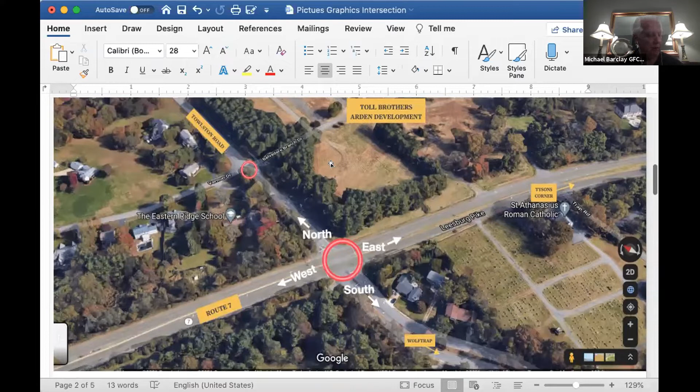We have about 10 or 12 members of the community that have asked to speak tonight. And as Scott said earlier, we're going to just roll through those without discussion of the individual issues and go through them completely. After that, Bill Cutler and Steve Kuntz are going to make a presentation on some of the design issues. And then we're going to go back into the individual issues and have a more hearty discussion on them on an issue by issue basis, so we make sure everybody's satisfied.

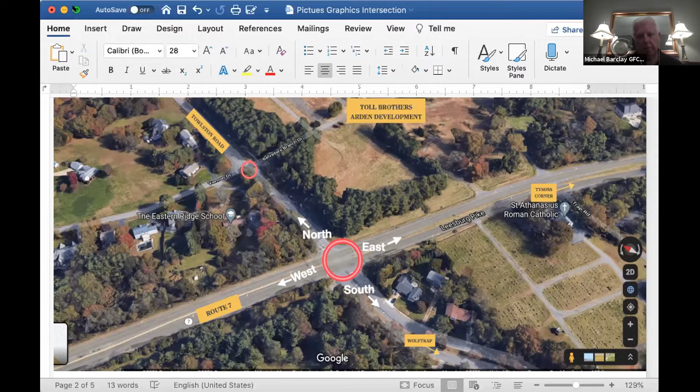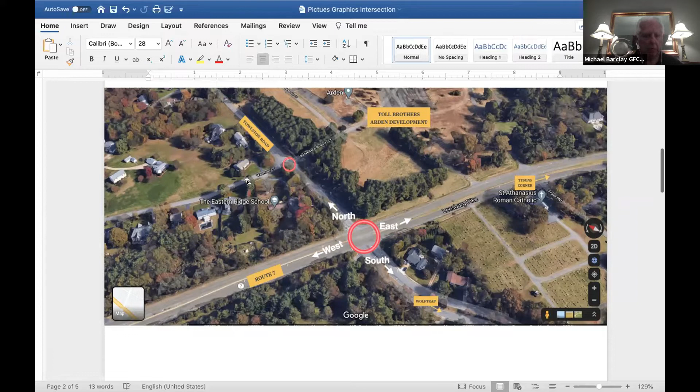I thought I'd start with 3 slides that give you just kind of a basic orientation to the intersection. The red circle there is, of course, the intersection. Eastbound, Route 7, of course, heads towards Tysons, westbound towards Leesburg, and then southbound Towlston heads towards Wolf Trap. As you can see, the small little circle up there is the intersection leading into the Arden development. Scott, if you go to the next slide, please.

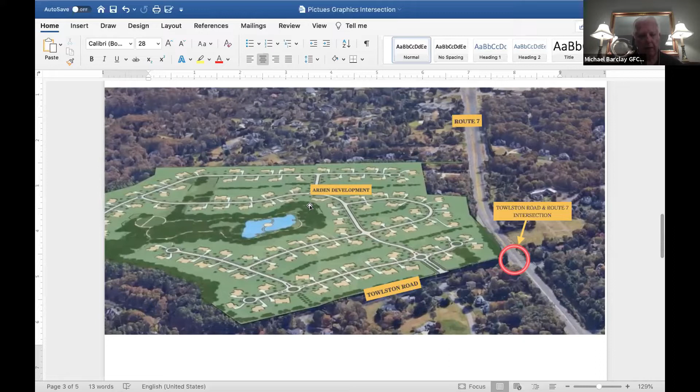And I wanted to give you a sense of the scale of the Arden development in relation to the area around it. It's pretty impressive. There is one entrance and exit out of the Arden development at this point. And it's 100+ homes. We don't have an exact count, but it's quite a bit of traffic that is going to be generated out there. And the point of showing this also is to show how close the entrance and exit of Arden is to the Route 7 intersection. And there's a lot of concern about the impact of that. Scott, next slide, please.

We know that VDOT has very specific design standards for intersection sight lines. What that means is that when a car is turning left onto Route 7 from Towlston, the driver would have an unimpeded view of traffic traveling west on Route 7. Sightline distances are expressed in terms of feet. That is, how far can the driver of the turning vehicle see a vehicle approaching the intersection. So the higher the posted speed, the longer the sightline distance needs to be. And the more lanes the vehicle has to cross, the longer the sightline distance requirements.

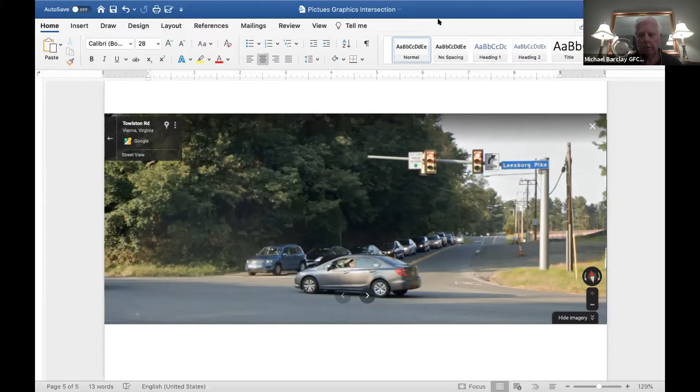We need to turn Carl on. Okay, I think I'm unmuted now.

My name's Carl Pearson. I've been a resident of Great Falls for 32 years, and I've been on the Transportation Committee since 2009. My involvement in Towlston Road goes back to Toll Brothers having two entrances, exits, one further down Towlston Road, which was very dangerous on a hilly blind curve.

My former colleague at GFCA, Eric Knudsen, and I did a traffic count, and we showed that there was as much traffic coming into Towlston as going out of Towlston. It's a busy road. And Toll Brothers decided not to have that second entrance. That would have been another accident creator. I had intended to go over and look at trucks turning into this development, understanding that these houses are being sold. Moving vans are 18-wheelers and they're huge.

But we had an incident that occurred at 5:30 p.m. on Monday, March 22nd, when our daughter was first in line to turn left from Towlston Road onto Route 7. She looked left and saw an 18-wheeler speeding to make the right turn onto Towlston. There were cars behind her, so she could not back up. Fortunately, the truck driver saw that the intersection was too small for him to turn, so he hit his brakes hard and skidded into the intersection, narrowly avoiding our daughter's car by inches.

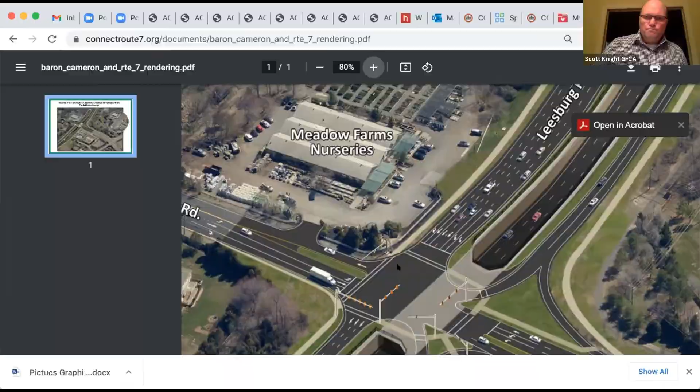David Spencer, you wanted to reserve whether you wanted to speak on your topic. Do you want to speak now or wait till perhaps later? Yes, I specifically want to see what the final design of the intersection will be, because my concern today is that there is no way to widen that intersection because of the location of utility poles and the support arms for the traffic lights. And something is going to have to be moved either on the Arden side of the property or the northwest corner of that intersection to widen it sufficiently to give enough lanes to contain the traffic that wants to turn left and or allow for right turns.

And the intersection is far too narrow. As Carl pointed out earlier, large trucks cannot make the right turn off of westbound Route 7 onto Towlston Road today. So I'm very interested to see how it is that VDOT will address those issues. Thank you. Thank you, David.

Jennifer Falcone is up next, but Jennifer's asked to reserve her speaking time until later, after the VDOT Dewberry presentation. And we're going to move next to Bill Cutler from VDOT and Steve Kuntz from VDOT's design contractor, Dewberry. They're going to present a 10-minute overview of the intersection. When they're done, all the issues that we've raised but haven't addressed, we're going to go back in and look at those in some detail. We want to make sure that people's issues are addressed and where we have answers they can give really good explanations of what's going on.

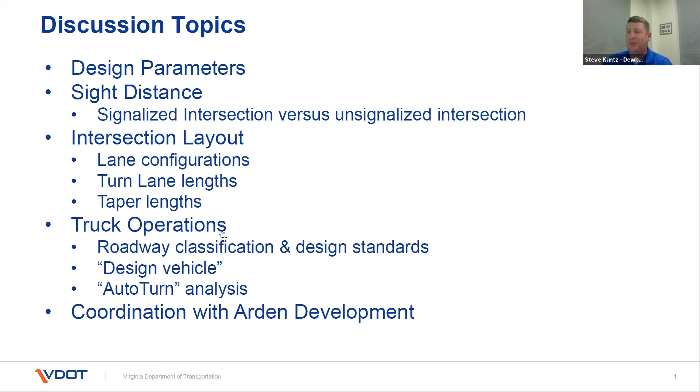So as Bill mentioned, all of the points and comments made here this evening are certainly valid, and they are things that we consider throughout the design phase. So I think we will have some information that we can share on each of those topics to hopefully alleviate some concerns. 10 minutes is not enough time to go through them. We do have several slides here, and I'll just hit on the highlights that I can. Certainly Route 7 is designed for 60 miles an hour. Towlston Road is designed for 35 miles an hour. That's not necessarily the posted speed. And I think somebody hit on it earlier.

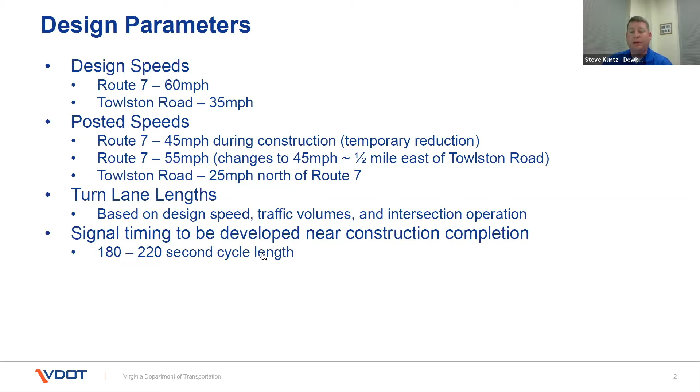We've reduced the speed to 45 miles an hour currently during construction because frankly, many of the elements of Route 7 prior to construction don't meet the design requirements for 55 or 60 miles an hour. So when there's construction activity and work zones going on, it was even more important to reduce the speed to 45. But the plan is to increase it back to 55 when the improvements are complete and the roadway's brought up to current standards to meet the 60 mile an hour criteria. A lot of discussion about turn lane lengths. They will be lengthened as part of the permanent improvements. And then signal timing is something that we can talk about in a little bit more detail later.

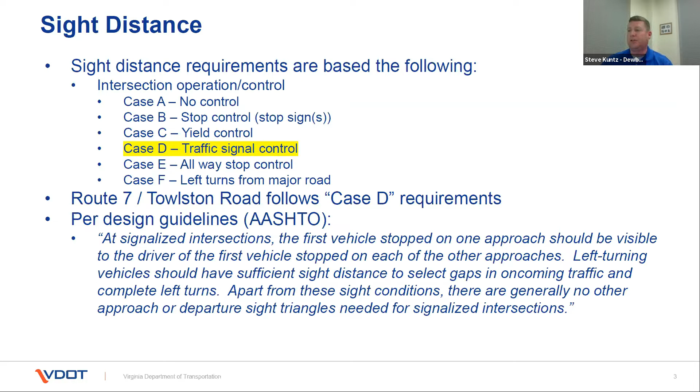Certainly sight lines and sight distances at signalized intersections and unsignalized intersections, each of those has their own requirements. As Mike hit on earlier, they are dependent on the design speed. They're dependent on the width of the road in many other cases. At a signalized intersection like Towlston, it's different than at an unsignalized intersection. And even though at a signalized intersection, you only need to look at the very immediate area around the intersection, we do have adequate sight lines much further than that. And we can talk through those details here in a little bit.

Now, truck operations is something else that we consider. One of the things to recognize is there's a lot of different types of trucks. There's single unit trucks that are not articulated. There are articulated trucks, and of those, there are many different lengths. The large trucks that you see on the interstate, the long haul trucks, typically have a 53-foot trailer. Those are identified as a WB67, and that's not what this intersection is designed for.

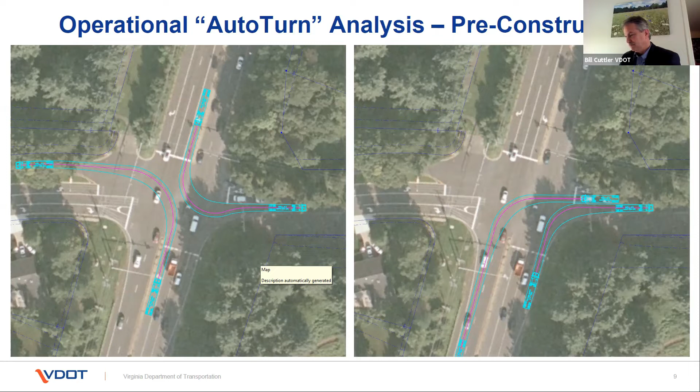But in all of the configurations that we looked at here in this interim condition, which is close to what's out there right now, you can see the WB40 is able to make that movement without off-tracking into the adjacent lanes. The WB40 is typical for this type of intersection, as I mentioned. If there's a full 53-foot trailer making this turn, they would need to go into the opposing lanes, or the back end of the trailer would run off the road a little bit. That can occur in some situations, but it's not the design vehicle for this type of roadway.

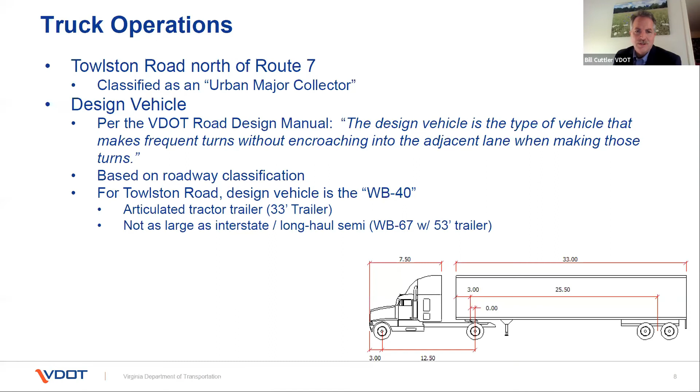Steve, can you just clarify, because I think this is a really significant improvement that we're going to make. When you're on westbound Route 7, as you just said, there is a very short right turn lane. Can you describe how short that right turn lane is today, and when we're done in the final condition, what is the length of that right turn lane? Because when you add length, it's not just about storing more vehicles, which is partly what it does, but in the free flow condition it also allows vehicles to slow down in that right turn lane. And as Mr. Pearson said earlier with the story of his daughter and that unfortunate incident, it sounds like a truck driver was not slowing down enough. So with our new right turn lane, go ahead and describe the differences.

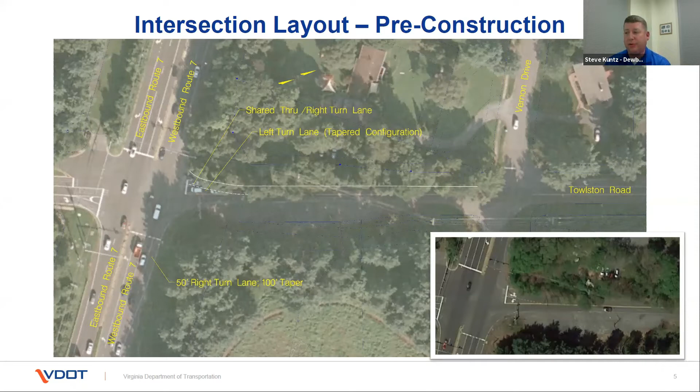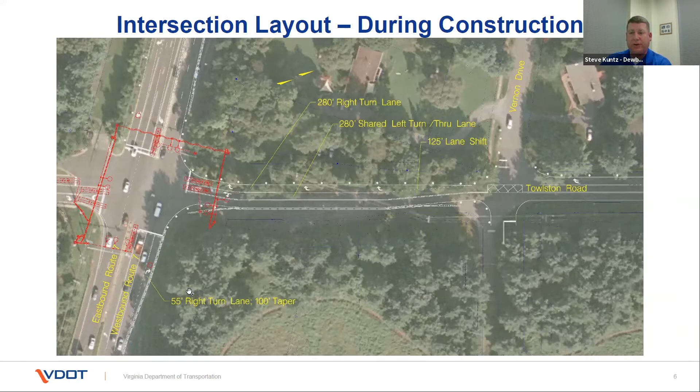Now, the minimum that's allowed by standards is a 200-foot turn lane and a 200-foot taper. That's based on design speed. It's based on capacity analysis. Again, a lot of different things go into sizing of turn lanes. Right turn lanes can typically be a little bit shorter than left turn lanes, because as you can imagine, this right turn movement does not have to stop at a red light as frequently.

The only time it has to stop at a red light is when the eastbound Route 7 left turn lane is in operation, or when the Towlston through movements are in operation. It's required to stop then, but at the other times they can make a right turn on red. So that's why the turn lanes can be shorter relative to the overall lengths.

For a comparison, the left turn lanes are going to be around 900 to 1,000 feet on Route 7 approaching Towlston Road. And that's because they have to accommodate the queuing that's expected, plus the deceleration distance and the braking distance. So 290 feet is much longer than what's out there today. It'll accommodate the deceleration length. It will accommodate the queuing that's going to occur in that right turn lane while the signal's red. But it is much better than what's out there today.

Okay, we have a question about sight lines. When somebody's turning south on Towlston from Route 7 heading westbound, given the hill coming east on Route 7, is there adequate visibility? So the westbound Route 7 turning south on Towlston, that'd be a left turn. Yes. This left turn, it is adequate. So the sight lines, as we look at these, there are different signal operations. There are permissive lefts and protected lefts.

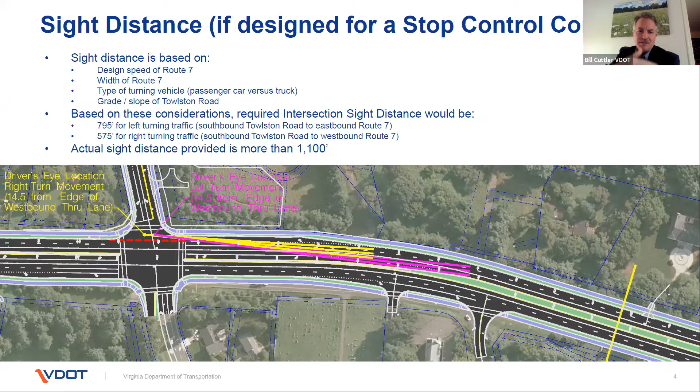The section that we are improving is obviously closest to Route 7. That will be flatter. It has more visibility, but obviously as you go north, or on this slide to the right toward Leigh Mill Road, there's a lot more hills and turns, and so we are going to repost that at 25 miles an hour, and that's coming up this month. That will happen, and that will be a permanent change. And as I said, that was in part because of the petition of the Route 7 Citizen Working Group, which includes some GFCA members.

Okay. Thanks, Bill. A couple questions here, and then we'll move on. There are a couple questions about the size of the design standard for the trucks. One question is, is that larger than moving vans? And another person asked about 10-wheel dump trucks, whether or not they would be able, when this is done, to make that right turn onto Towlston safely. Sure. So the 10-wheel dump trucks, yes. In addition to the articulated truck that we looked at, the WB40, we looked at non-articulated vehicles like fire trucks and school buses.

Large dump trucks are not as large as those vehicles, and they would be able to maneuver that turn without any problem. Moving vans, again, it depends. The long distance moving vans, if you're moving from East Coast to West Coast, those are traditionally the 53-foot trailers that are much larger. I know when we moved a few years ago, we had 2 non-articulated trucks. Those would be able to make the movement.

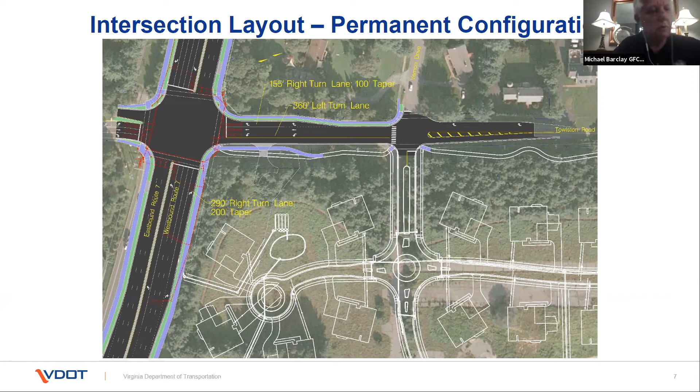Let's move on. Ed Phillips had brought up the issue of baseline data and projections, and he had a number of data issues that he posted on data that we'd like to have baselines. And I think one of the issues there is in the future, we're looking at saying, how well is this working? Is this intersection efficient? Is it working well? Is it safe? And what are the metrics we use to make that determination?

So I think part of it, as Ed pointed out, is that we're at a disadvantage. We don't have the data, and these are really cool drawings, but we can't generate cool things like that, and we don't have the data that you guys have.

So I guess one of the things, and this will touch on a point that Scott will talk about later, is we want to be able to say, okay, if this design is going to be built as built, does it work? Does it work as well as it should? In the future, if we say we don't like it, we want to be able to say we don't like it because, and we have data to prove that, and it's the right metric.

It's the same thing you guys would look at, VDOT would look at, to say, yeah, this intersection is not functioning as it should. So I guess the issue here that Bill, perhaps you could discuss, is there an opportunity somehow we can work with you guys to understand what your post-construction monitoring would look like and what kind of data we could use, say 5 years down the line, and look at this intersection saying it's not working. We need to do something different.

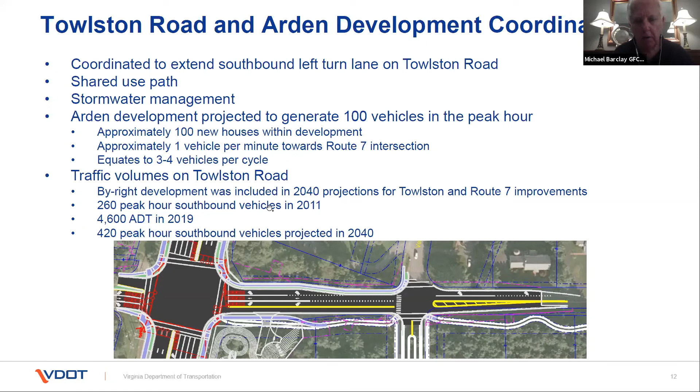Okay, Steve, we have a question for you. Can you show the final intersection design for the right turn for trucks, showing that we should have sufficient turn clearance there for the big trucks to make that turn? I think this is it. Hopefully you're seeing it on the screen here.

Hey, Steve, can you just quickly, I remember there was a question somebody had about some other vehicles, maybe other vans, but also school buses and fire trucks. Can you just describe that as related to the WB-40? Yeah, so we looked at those. They are typically shorter than the WB-40, but they're not articulated. So the turning parameters are different, but we did check those, and they all fit. They all turn within the pavement. They're not off tracking, not having to go into opposing lanes or anything like that.

The one thing I did want to point out on this slide, there was a comment earlier about the nose or the median on Towlston south of the intersection being really far away and people turning down the wrong side of Towlston. What you can see in green here, this is the median on the south side of Route 7, and that green shading is a new median extension that's going to be built as part of this project. I know right now there's concerns that it's difficult to see if you're approaching Route 7 from the north, so you're heading south on Towlston.

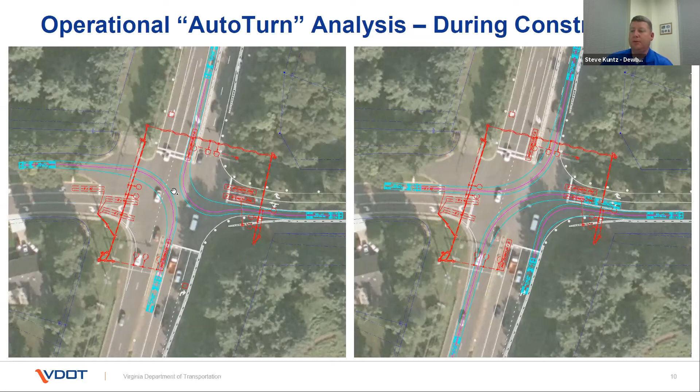When I flip to the next slide in the permanent configuration, you can see we're going to realign all of those so that the northbound approach, the left turn, the through movement, and the right are at the same location. They're closer to the intersection. That allows us to extend this median further to the north. And it also squares everything up.

So when you're looking across the intersection from the north side to the south side, everybody's going to be facing you at the same location. Same thing with all of the other approaches. You can see everything is squared up so that you essentially only have to look at one location to be able to see who is at the intersection and which lane they're in.

Okay, somebody's asking a very specific question here. Does the 290-foot right turn lane on westbound Route 7 include the 200-foot taper, or is the taper in addition to the 290-foot turn lane such that the total length is 490 feet? It is in addition. So the total length from the beginning of the taper to the end of the turn lane, which is typically measured at the stop bar, is 490 feet for the right turn lane from westbound to northbound.

Okay. We're going to need to move on. If we didn't answer your question, what we'll try to do is get those answered and either post it on our website or put out an addendum note to this meeting. But let's move on to the Arden subdivision and the policy on entrances and exits.

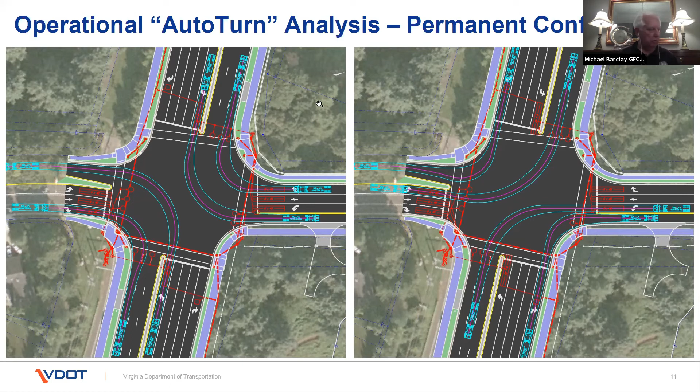And I might add, Bill brought up some good points. There is some question in our mind, and we really are looking for what is the right answer on VDOT's policy. We know that there's secondary street acceptance requirements, including multiple connections in multiple directions standard. And some of the questions are what is the requirement? And there's issues in there for waivers, as Bill pointed out, but we're not quite sure we understand that process and how that works. So anything you can enlighten us on would be great. And Bill Canis, add to that if I misspoke.

So yeah, I'm not the expert on land development. I think Bill said he's not a land development attorney, and I'm not a land development engineer. So I am not as familiar with those. I can find the right people that can answer those questions more specifically and better than me. But for today, I can answer a little bit of what happened with Arden. As some have already said, Arden, with roughly 100 homes, had the two entrances planned.

And so please keep in mind, while I know I'm VDOT and we're one VDOT, we are different divisions. I'm in charge of getting construction projects built. This land development project is where Fairfax County government will work with the developer, property owner, and VDOT in regards to the entrances. So when I came upon it, I was late in the game because construction is on a different track for our Route 7 project. And we had two entrances on Towlston.